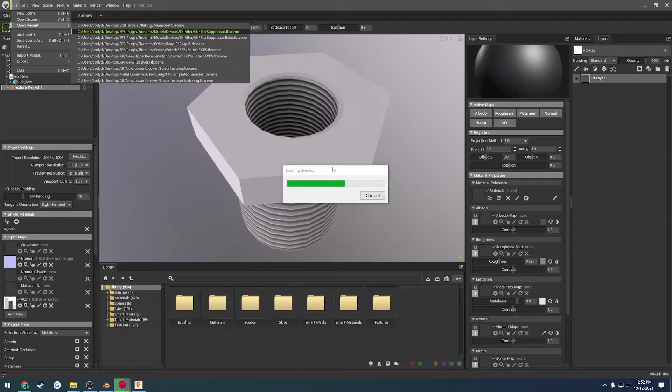All we're doing is we're making this guy here. So we're making the bolt. And as you can see in my version, I have some baking issues. Thankfully, they're on the inside and they're not going to be seen. I'm going to show you how to resolve those as well.

Because again, this whole thing right here is actually made right inside of Fusion360 with a little bit of cleanup inside of Blender, and was completely retopologized inside of MoI 3D. So just minimal cleanup. So I'm going to show you how to do just the bolt. So this should hopefully be a quick one.

I recorded this once already and it ended up being 40 minutes. So let's try to pick up the pace on this.

So basically what we want is to find some reference images. A friend had referred me to yandex.com, which has been phenomenal. So once you find one image of what you're looking for, you can find a ton of related ones immediately, and you get a lot. I don't know if you can see them all that well because it's not the greatest image, but basically we have two thread types.

We have the bolt with a slight chamfer. I don't know if I'm going to bother doing that. We have the outer threads here, which just go into the oil filter. So those are 3/4 by 16. And we have the inner threads, which thread onto the muzzle, which is 1/2 by 28. So we want to mimic those threads, and we want to get this relatively close.

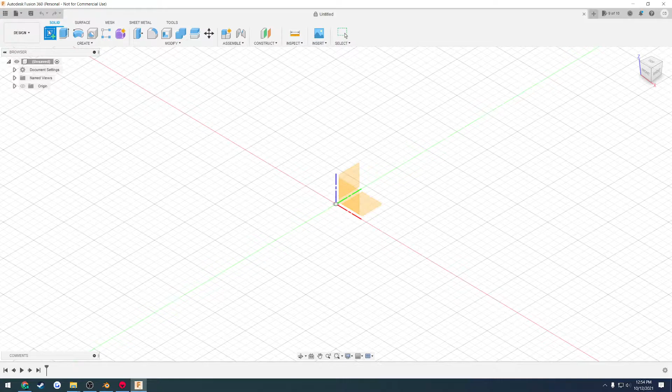So to begin, here in Fusion, we're just going to go ahead and create a sketch. Do it on any plane you want. I'm just going to do this bottom plane here. And we want to actually create not the outer threads, but the outer cylinder that we can cut the threads onto. That's going to be kind of our basis for scale. So we know that that is going to be 3/4 of an inch.

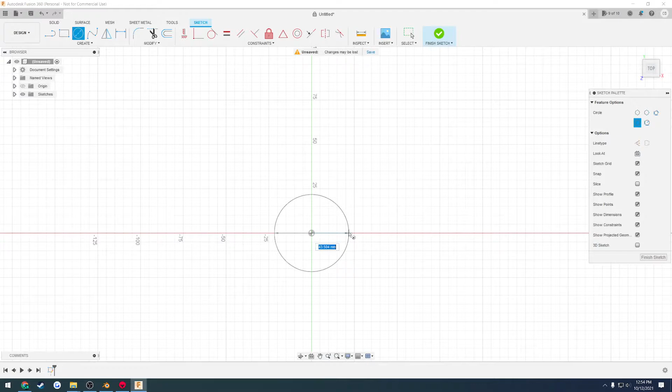So what we do, click this center diameter circle, select the middle, and we know it's 3/4 of an inch, so that's going to be 0.75 of an inch. And there we go. Now you want to make sure this is not the radius. As you can see, this arrow here stretches all the way across from one side to the other. If it stretched from the middle to the outside, you would want to halve whatever it is. So anyways, this is going to be the sketch that's going to contain all the information for the bolt itself. So I'm going to name it bolt.

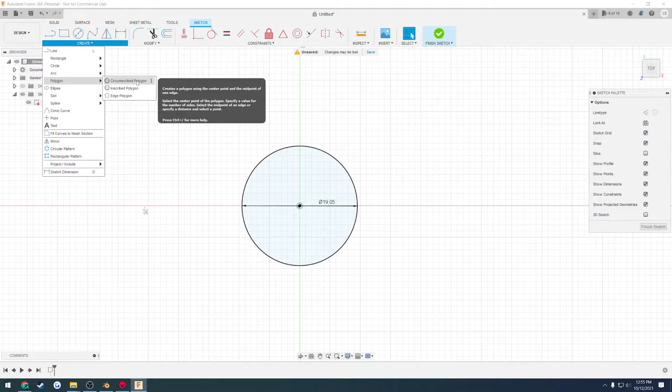Now I want to make the head. So to do that, we come up here to Create. We're going to go to Polygon and hit Circumscribed Polygon. Select the middle. And here we can see this is roughly where it's going to be to match up. So as you can see, even though it says 11 millimeters, I am bigger than our circle here. That is 19.05. That's because it's using the radius.

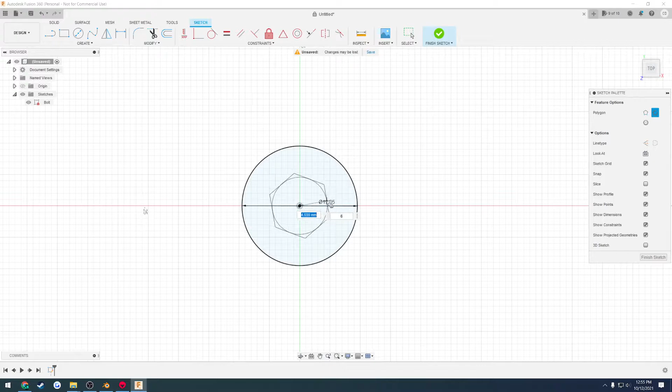So 9.525 is going to be roughly the same radius, actually it might be the exact, as this guy right here at 19.05. So I'm going to go to 12, and if I double that, I know that that's going to be at 24 millimeters. So it's going to be about there. So I press enter, and now I have roughly a 24 millimeter head. So if I were to grab a 24 millimeter socket, it should fit right on.

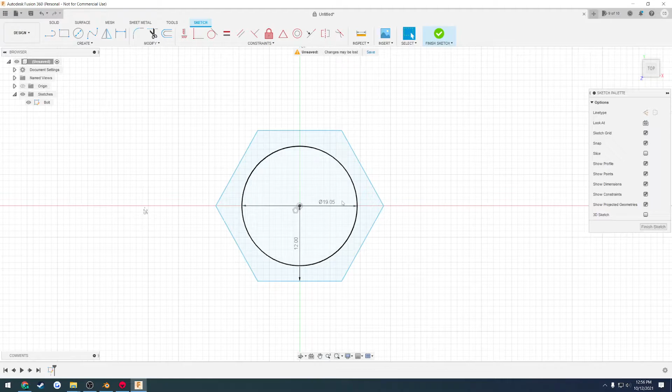So that's kind of roughly what you would use your real world baselines to follow. Okay. So now we want to set up and start extruding. So I'm going to hit finish sketch. And the way I'm pivoting around is I'm holding down left shift and middle mouse. If I let go of left shift and just use middle mouse, I can pan around.

So this is not a full Fusion360 tutorial. There are plenty of other videos about it that are way better than mine.

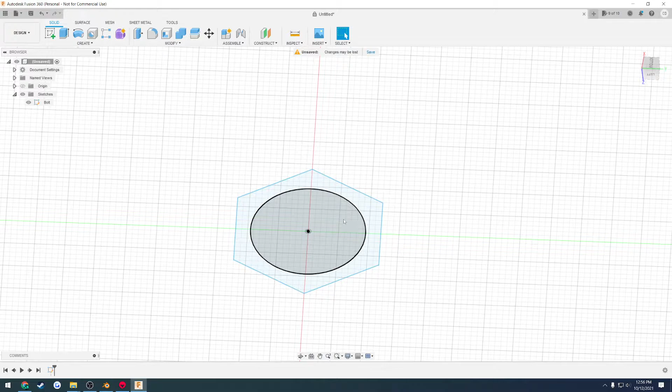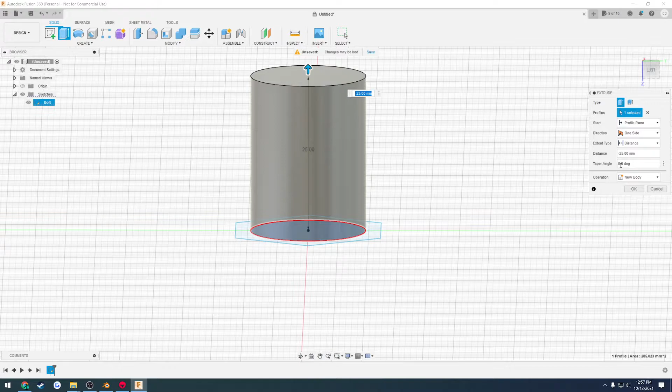So I'm just going to click on this inner circle here, and I want to press E to extrude it, and I just want to extrude it up. So we're going to do somewhere along the lines of probably, I think 25 millimeters will be good because this head's going to take up about 5. So we just drag it on up. It's going to say new body. We just press OK. As you can see, our hex head down here is gone.

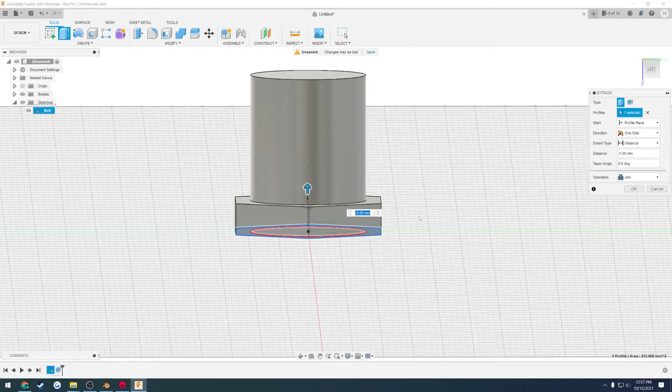So we can unhide that by clicking the little eyeball, whatever you call that. Clicking on the outer ring, as you can see, it only selects that part of the face. Press E to extrude. And we're just going to go up by 5 millimeters. Now, if for some reason this is all showing red, it looks incorrect and all that kind of stuff, if you look over here, it might say cut.

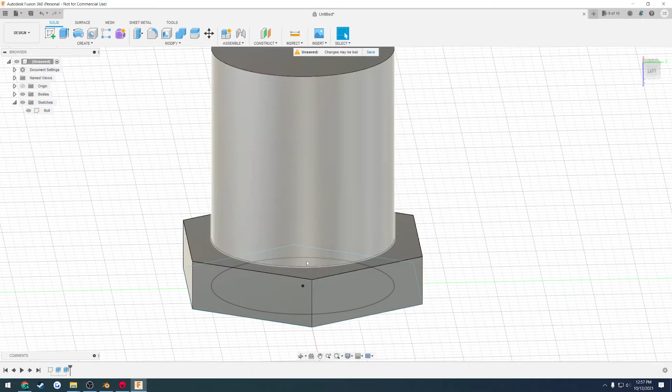In this case, I don't have a way to cut it because it's not intersecting at all. You want to make sure it's set to join. So we press OK. And now, as you can see, it joined the two together. They are now one single body. So we have our bolt, just with no threads. And realistically, that is what we want.

So next up, we need the inner hole. So we want to cut these threads out, which are 1/2 by 28. So we know that the inner hole here is going to be a 1/2 inch. So we got to make that. So the way we do that is I'm going to do that in a separate sketch. I like having dedicated ones for my cutters.

So click on Create Sketch. And if you can't select the plane that you want, make sure you're looking down, hold left click, and you can select whatever your mouse was going through. So in this case, I can select that face or X and Y. I want to select X and Y. And create my circle, just like before. And I want this one to be a 1/2 inch, so 0.5 inch. And press enter. We're going to hit finish sketch.

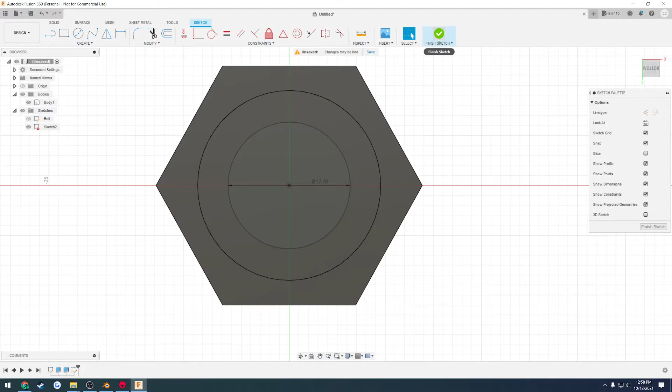Click on our circle. Press E and just extrude it right on up. And this is that red that I was talking about. And as you can see, it's set to cut. That's because it's a cutter. So you can see where it's wanting to cut out. So we just press OK. And we now have our hole.

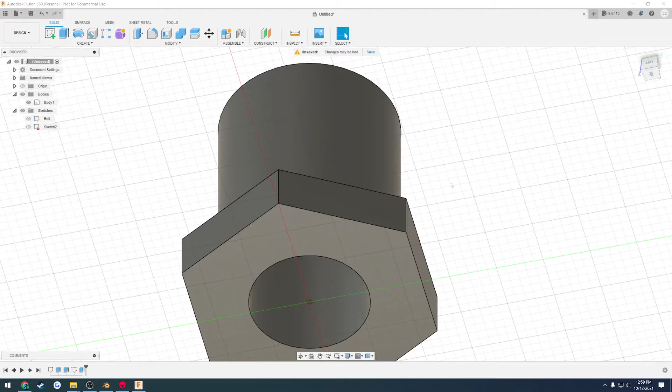I'll be right back. I got a text. Alrighty. So let's see. Yeah, back to where we were. It's only been about a couple seconds.

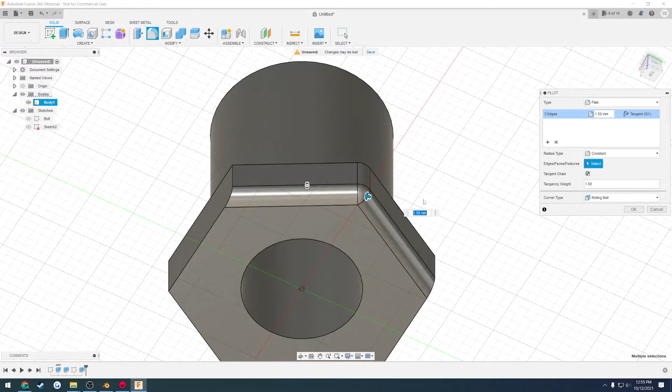Well, we can add a little bit of detail here. So if we look at this bolt here, it looks like we got a slight chamfer maybe around the edge. Or is that, let's see, what do we have? So we just kind of have it around the edges here. Nothing really fancy. We can do all that. Nothing real extreme. So it looks like they're very, very small edges.

I don't know if I want to do that because I kind of want to keep them sharp. I think that'll be better visually. So we'll probably just leave that. And we'll focus on this inner chamfer and the cutting for the threads. So we're going to do the threads first.

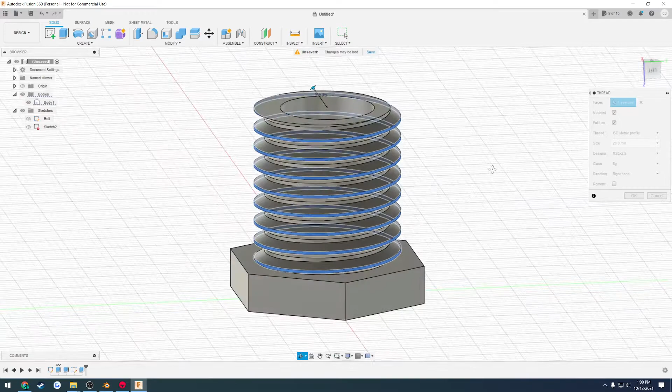So the way we do that is we click on wherever we want the threads to be. So in this case, I want to do the outside, or if I want to do the inside, I just select it. So I click the outside, go to create, select thread, check modeled, and in our case we want it to be full length because obviously it goes the full length of the shaft, and we want to change this to standard. So currently we're on metric. We can go to unified screw threads.

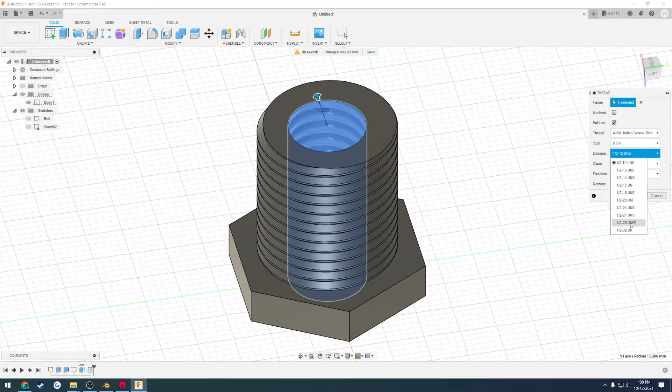Here's where we have 3/4 by 10. We want to go to 3/4 by 16 and press OK. So that'll give us the correct threads that we need there. We select the inner, do the exact same thing, change it to standard, and we want 1/2 inch by 28, like so. And again, make sure we check modeled. Press OK, and there we have our threads.

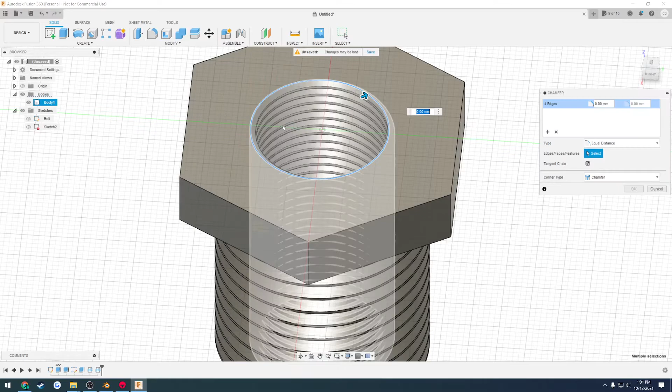So now we want to add just kind of a slight chamfer. Now, here's the cool thing about the timeline. As you can see, if I want to chamfer this whole edge, I would have to go through, select all these, and then I can select chamfer and just kind of see how it goes. It'd probably be fine. So that does okay. I'm not a huge fan of the result, but what we can do is simply drag this timeline before we cut the threads, or before we cut the inner.

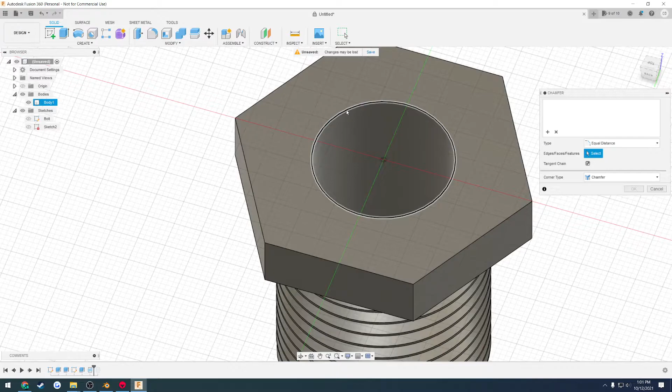Then we can select the inner ring, like so, and we can add our chamfer. Whoops. Just like that. So I'm going to go 1 millimeter. That actually looks quite okay. So we'll leave it at 1 millimeter. Then we can just drag the thread back over it, like so. And as you can see, it's not cutting into the chamfer. So I want it to.

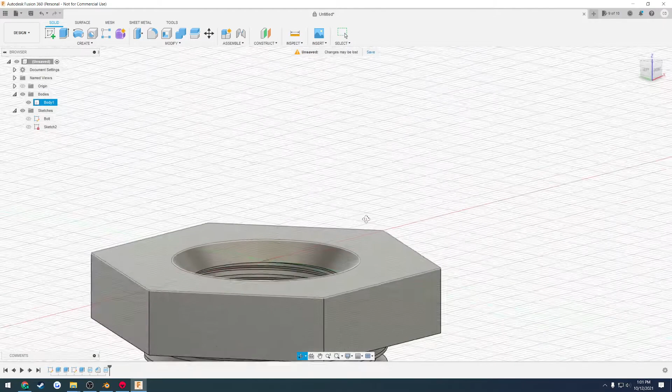So I want to just simply drag our chamfer right here over to the other side of the thread. As you can see, we have our chamfer and our threads now cut right into it. So it's become a part of it. And in my opinion, that looks good. That's kind of what I want.

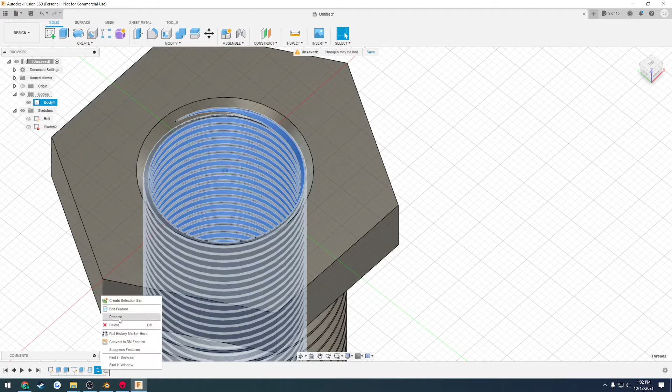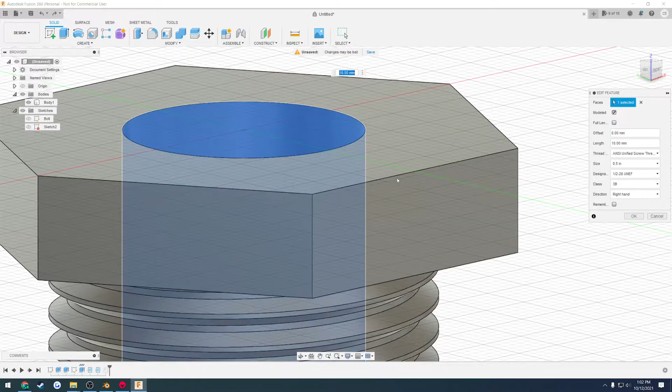And if we want to tweak it, what we can do is we can change that from full length and instead go really just as far as we feel we need it to go. So I can go slightly lower, press OK. Granted, that's going to give us the same result. Actually, I pressed Control Z, so that's part of the reason why. I can go a little bit lower like that, press OK, and we just get ever so slightly different results. So I'm just going to Control Z, go back to full length, and leave it like so.

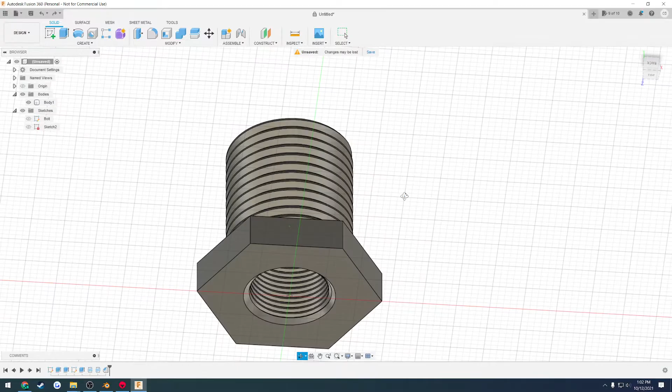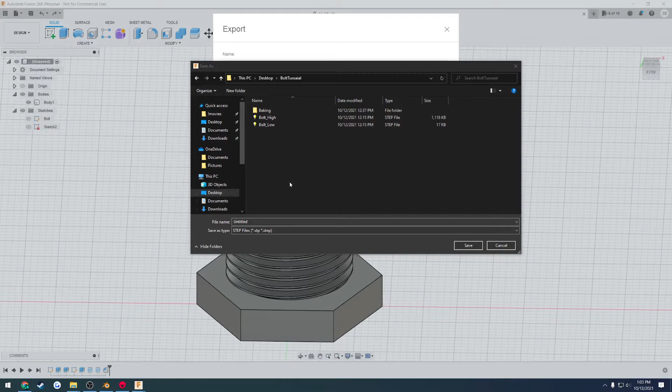So this is our high poly right here. So what we want to do is we want to export this out and then work on the low poly. So let's go ahead and export that out real quick. We're going to go to File, Export, change the type to STEP, and save it where we need it. Like I said, I did this before, so I'm going to delete all these real quick and get started fresh. Alrighty, so I'm going to name this one bolt_high and export.

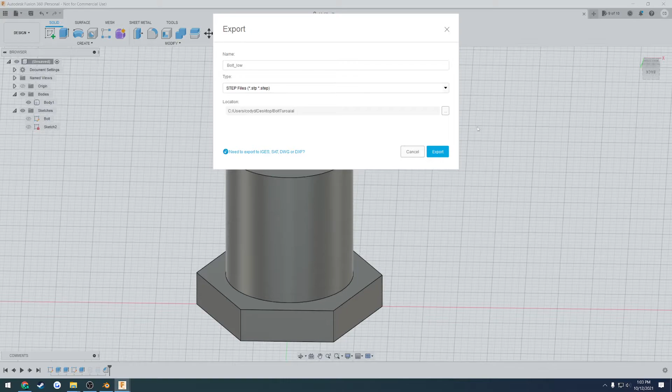Then to make the low poly, select both the threads, right click, suppress the features, and do the exact same thing, just name it bolt_low and hit export. Now the naming in this case doesn't matter. I'm just doing it for the sake of cleanliness, so I'm going to open up the low in Moi 3D. So once I'm in here, I just go to save it as FBX, and I'm going to name this one bolt_low. And here I can change my settings.

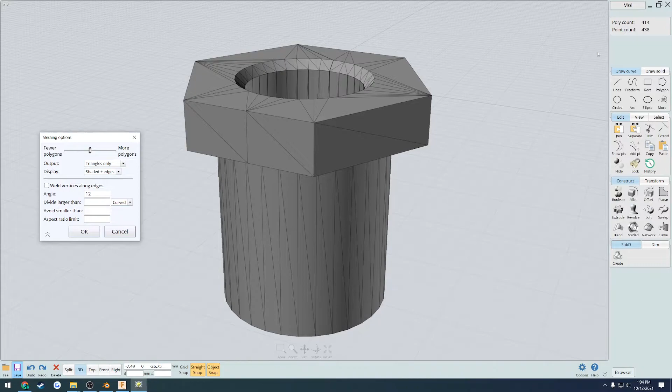So if we want to see the poly count, you can see we're at 914. I just set it to triangles only so I can see it, or 414, sorry. And that's a little high for me. We don't need that much detail for something like this. So if I bump this up to 20 and look at it now, that's a lot more appropriate in my opinion. We're down to 270. I think it looks good. Let's check 25. And to me, that's going to be a little bit much because we're going to see a lot of these harsh edges. I think 20 should hide them quite nicely.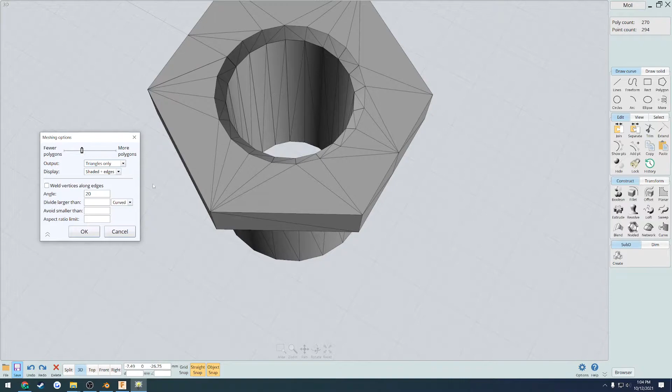So we're going to select back to N-gons. As you can see, that is much easier to work with inside of Blender. And just press OK. And that exports it out for us. Now we're going to do the same thing. We're going to hit open and open up our high poly.

The reason I do this is because I want to lower it since it's a little excessive when you don't. To show what I mean, let me change it to triangles and press 0. As you can see, this is 326,000 for the poly count, and that's just super dense.

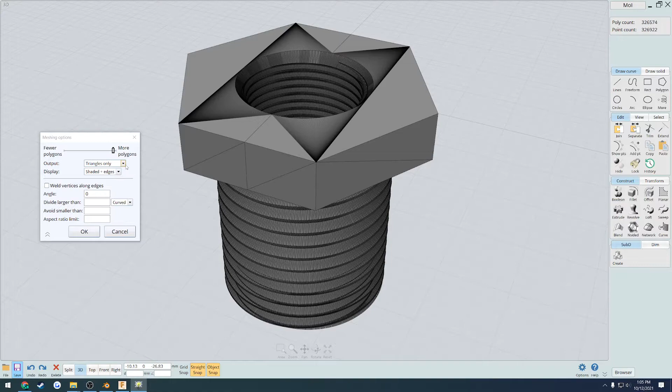There's really no reason for it. Same thing, I've had some issues where I would export the high poly out as a triangulated mesh already from Moi 3D, and when I bring that into Blender, there were some issues with how things were set up. So I want to change it back to N-gons and lower this a bit. Let's go down to 3, and this is at 25,000.

That is nice and smooth. Obviously, the bigger the number, the less detail you get. So I want good threads, so I'm going to leave mine at 3 and press OK.

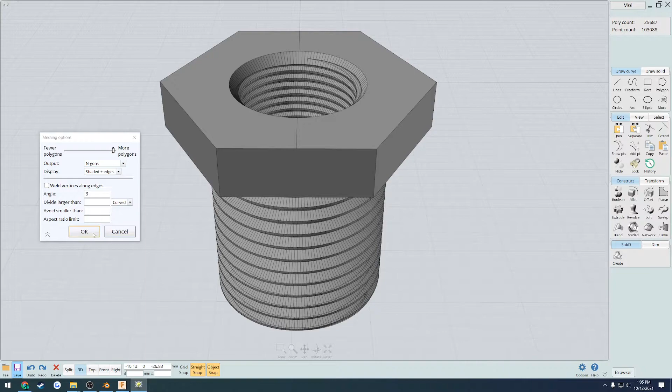Now let's go to Blender. I want to save this and bring in those two models. So we're going to import FBX, select both, and I'm going to scale them both up by 100.

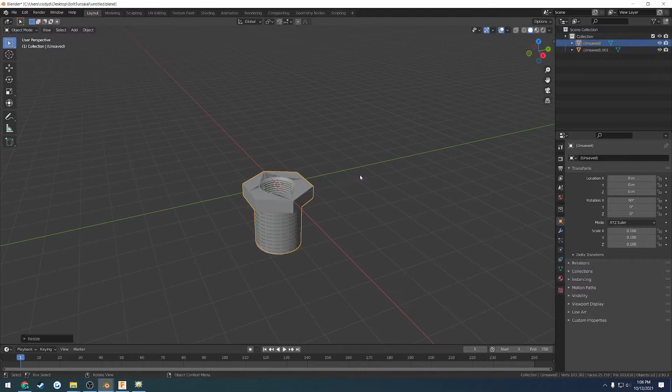This one here is the high poly, so this one's going to be the bolt_high import. This one here is the low poly, so we're going to do bolt_low import, just so we have the naming and know which one's which. All right, I'll be right back. Someone just pulled in. Alrighty, I'm back.

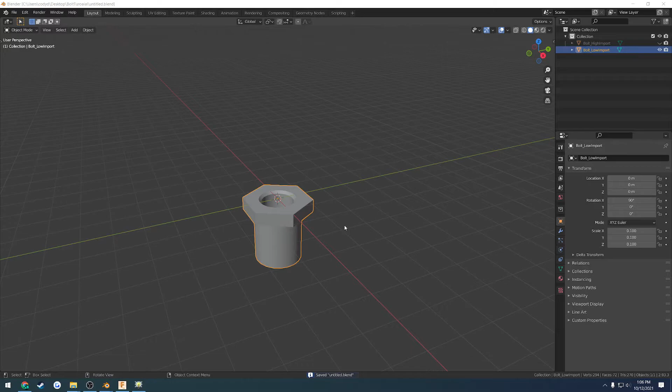The reason I'm doing this is because I want to have a separate mesh for the low poly and high poly before I export, because these are not triangulated. I want to have a separate mesh before I triangulate. Same thing goes for the unwrapping here, just to make life easier so I can duplicate it, triangulate it, and export it right out.

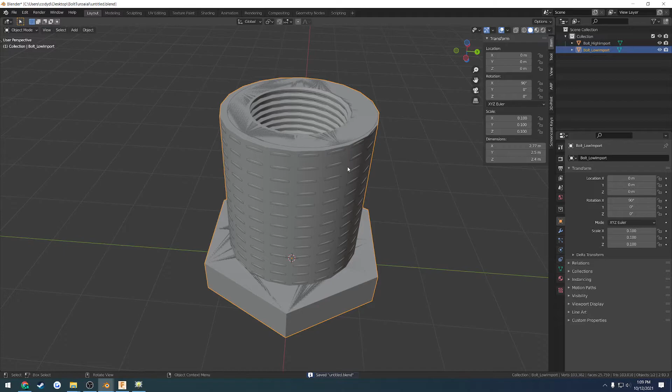So we want to go ahead and actually unwrap this, but first we want to apply everything we have. I'm going to select both, press Control A, and hit all transforms. As you can see, that did both. Let me turn on screencast keys real quick.

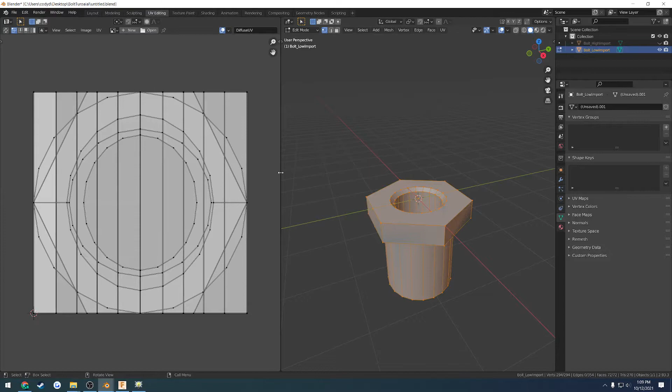There we go. Once we've done that, we can go ahead and unwrap the low poly. So we're going to go over here to UV editing and look at it. One of the things we can do, let's actually try to unwrap it first. This is the result that we get.

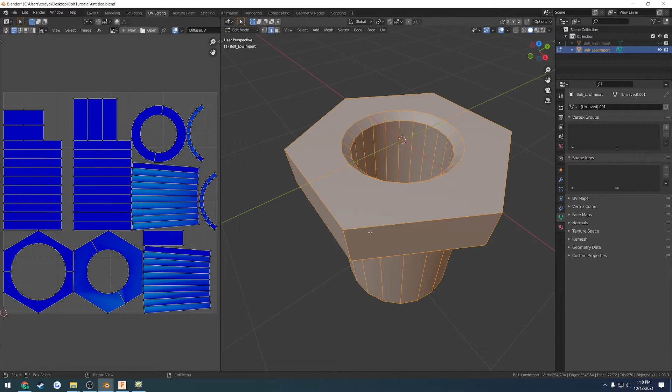Let me enable stretching. This is kind of like an auto unwrap setup, but we want to do this manually because we can clean this up a lot. We don't need to have all these curves, it's just ugly. So normally, I don't know why it didn't come with them, but normally they're marked...

The edges are marked as sharp, and just to be safe, we want to do that again anyways. So I'm going to go to Edge Select for this layout, and we can select all around the edges. However, when I Alt-click, normally it's supposed to select the whole ring.

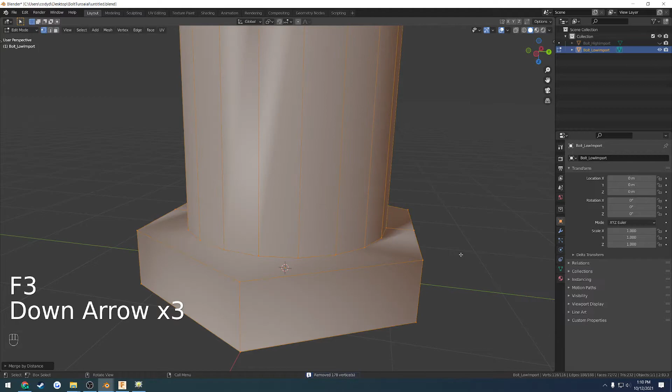But you can see if I click on one of these vertices, there's actually two here. That tells us that we need to press A, press F3, and do Merge by Distance. As you can see, that right there broke the shading. So if we click on Sharp Edges...

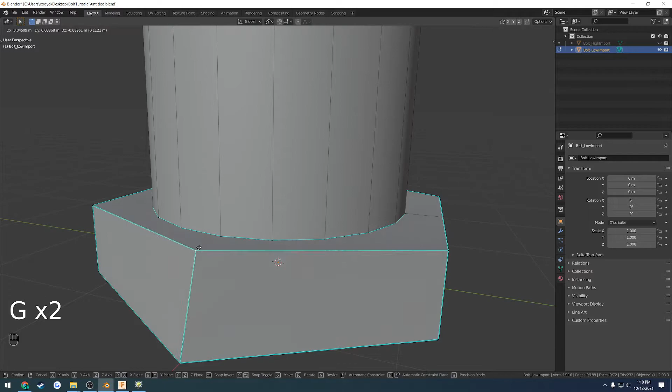Now it's actually showing our sharp edges. They were kind of being hidden by the overlapping or overlaying faces, I think. So now when I move them around, as you can see, everything is fine. Normally you would end up getting this exported out as sharp for us, with all the edges marked sharp that we need roughly.

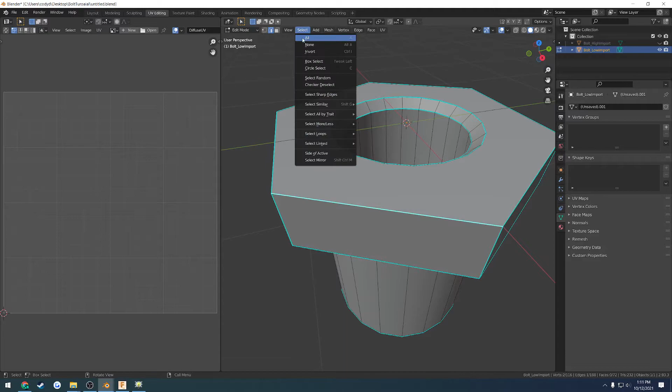Back into UV editing, I want to show you a little shortcut. If we click on one of these sharp edges, we can go to Select, and Select Sharp Edges, and that selects all the edges that are marked sharp. Then we can right click and just hit Mark Seam, and that'll give us a decent result.

We obviously have some stretching here and stretching here, for the inner and outer cylinder because they don't have any seams. But I want to fix this issue up first. So I'm going to click this little arrow so we can see them both without having to click on anything.

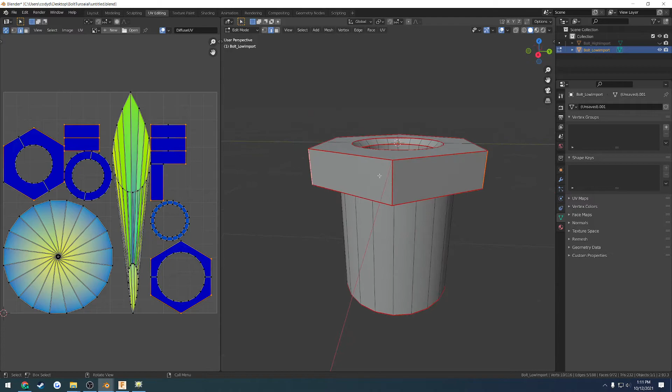I am not a fan of how that has broken this up into little pieces, and that's because there's a seam everywhere. So I'm going to click on pretty much every single one except for one like that, and simply clear the seam. Then when I unwrap, as you can see, it is now all in a straight line right here. So that's great.

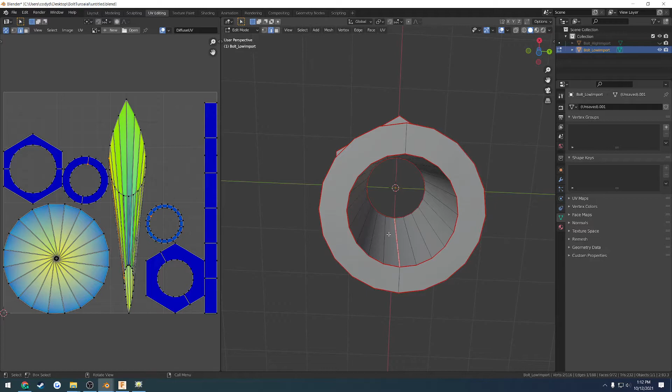Now we got to fix this issue up. If I click L here, you can see it's the entire inside. I'm just going to select where they're linked up together like this and mark it as a seam. I'll do the exact same thing right here on the other side and mark it as a seam. And unwrap, and now we are good to go.

Now we just want to help the UV space because we have a lot of wasted space here. With this plugin, if I hit Update Stats, we're only using 35% of the area.

So if I want, I can go to UV Packer. This is a free plugin. Go ahead and Google it, and it'll just take you right there. Just look for UV Packer Blender, and you can change the padding to 3, change the type to high quality, and hit Pack. And that's the result it gives us.

So let's compare. We have 35. Now we have ever so slightly more, but we also have a lot more free space. So it's kind of compacted it.

Now this did not do a very good job for whatever reason, I don't know why. But what I'm going to do is click this again. The reason for that is because when I press L, it's selecting other edges as well. If I unclick it, and then press A to select all... sorry, I got interrupted. But the reason for that is now when I select it, I only moved that around. They're not linked together really in any way.

So here, I can drag it inside. Yeah, I'm going to go inside of that one. I don't know if this one will fit. Might be a better option. No, I do not trust that.

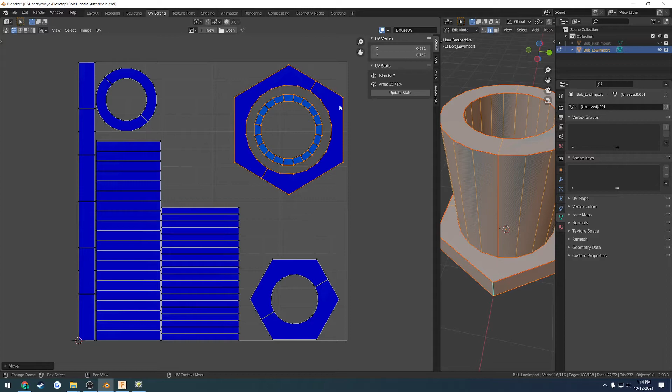So let's see which one is that going to be in for? That should be for this top guy. So realistically, we don't need that much detail there. Let's see, that ring is going to be for what? Okay, so that ring, this guy right here corresponds to this inner side.

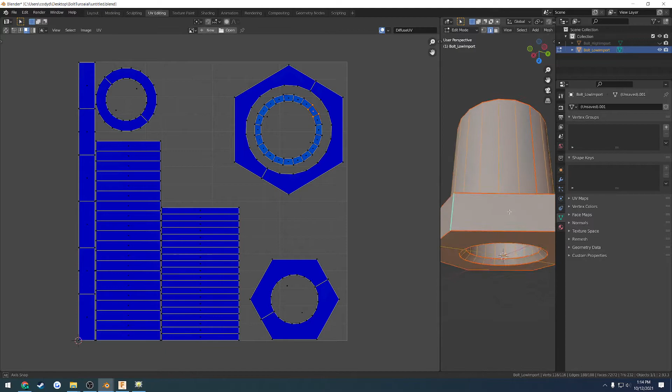This top corresponds to here. So these are areas that we really don't need much UV space wasted. They don't do much, they're not going to be really visual. So I can select this guy. This is one I want to scale up a little bit more. And I'll move it over.

So from here, let's see. These are the halves. So my guess is, yep, that is going to be this outer edge right here. Again, not all that important, so we can just take it. I'm going to move this one over here as well. And that gives us a little bit more space.

So what I'm going to try to do is kind of expand these up a bit. So this is going to be the outer threads here, or is that going to be the... no, that's going to be the inner threads. So right here, and this row is going to be the outer threads. I'm just going to kind of scale these up however I can, while still making them fit.

Something probably along the lines of that. And then these are going to be the inner threads, and I'll make them take up a little more space, something like this. Okay, now I can select, and I'm just going to move it over, make it a tighter fit. I'm going to select these two, move them down, and I'm just going to scale them up.

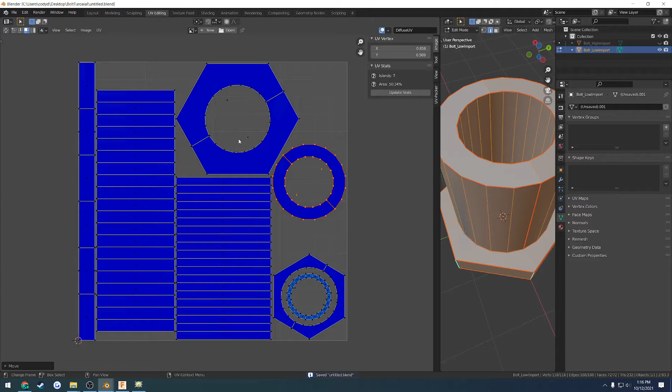Take up a little more space, select this guy, and do the same thing, just like so, so they take up more space. Now when I hit update stats, I'm using 50% of the UV island space as opposed to the previous 30, I think it was like 35. So we're taking up a lot more space, just a lot better, and that's what we want.

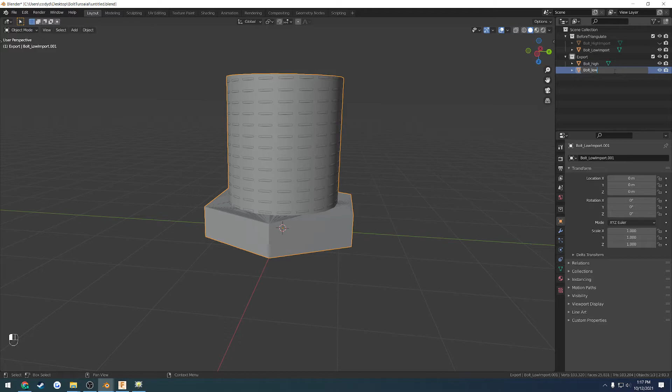Now I want to set this up, and I want to triangulate the high and low poly just in case. So I'm going to rename this collection to 'before triangulate', then duplicate this collection and name it 'export'. Then I want to rename these to have the suffix underscore high and underscore low, and hide the before triangulate collection.

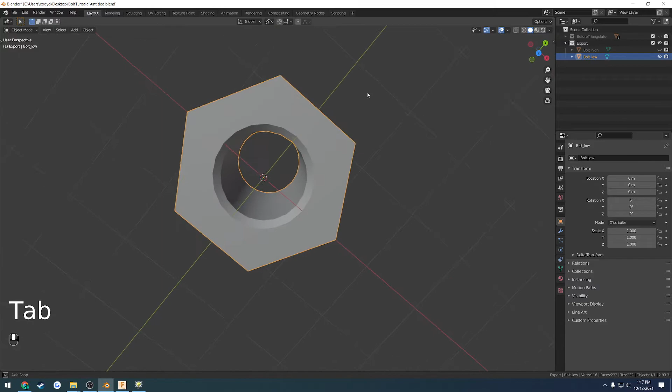Let's work with the low poly first. I'm going to go to edit mode, press A to select all, and Control T to triangulate, and look at the job that it did. That's honestly probably what I would have done roughly manually, so we're good there. Let's make sure there's no real glaring shading problems, and in my opinion this looks just fine.

We're going to do the same thing to the high poly. Press A, Control T to triangulate, make sure there's no real problems. I am not seeing any. That's dense enough of a mesh where we shouldn't have any anyways.

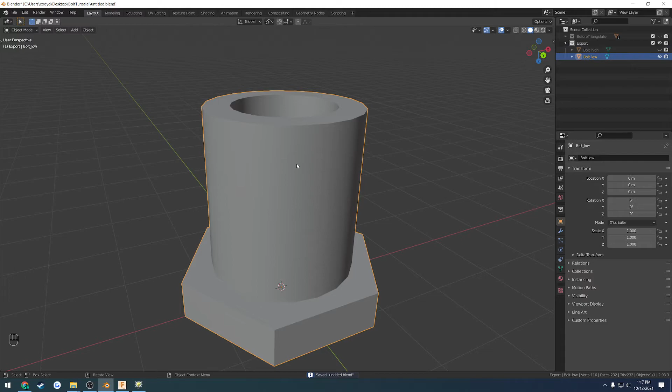Now we're ready to export. So we're going to click on the low, File, Export, FBX, and I'm going to create a new section and call it Baking. Let's go there, and this one's going to be bolt underscore low. Now I want to change these settings here. I'll make a preset, but we're going to do selected objects, mesh, scroll down to geometry, change smoothing to face, and uncheck bake animation, even though it's not going to do anything in this case.

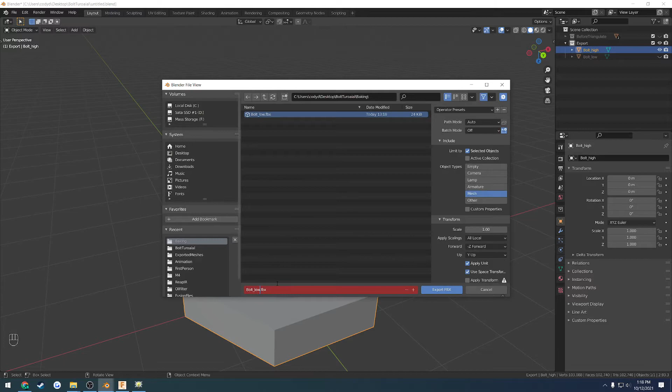So now we can hit export, and we're going to do the exact same thing to the high poly, except we're going to name it underscore high this time, and hit export.

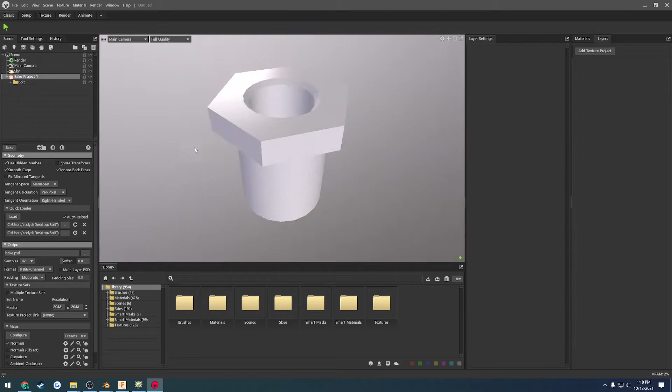Once that's done, let's head over to Marmoset, and we're going to get our bake set up. So we're going to click on New Bake Project. We're going to use the quick loader, hit load, and select both the high and the low, just like so. Now when I hit H to go to the high poly, we can see we have the high poly. Go back to the low poly, we have the low poly. So now we can try to bake this and see the results that we get.

The first thing we want to do as well, hit P. Actually, we do have a material set up, so we're just going to hit P. Let's set up the baker path first, actually. So for baking, I want to change mine to Targa and call it T underscore bolt bake. And hit P to set up the preview.

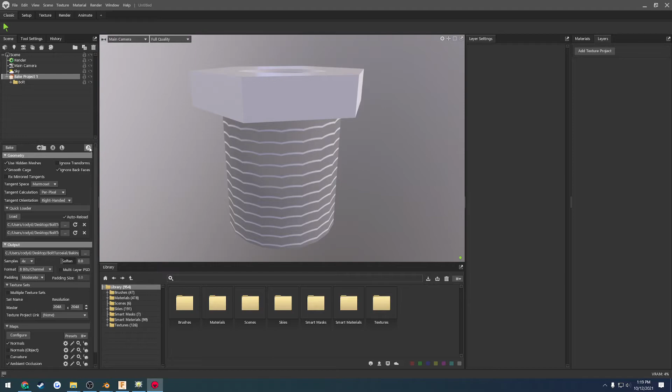So this is just with only the normals. I want to actually select the ambient occlusion as well, because I want to bake that, and press bake. Now press P one more time so it adds the ambient occlusion to it. As you can see, all it's done is taken the map that we have and applied the normal map and the occlusion. So this doesn't look horrible.

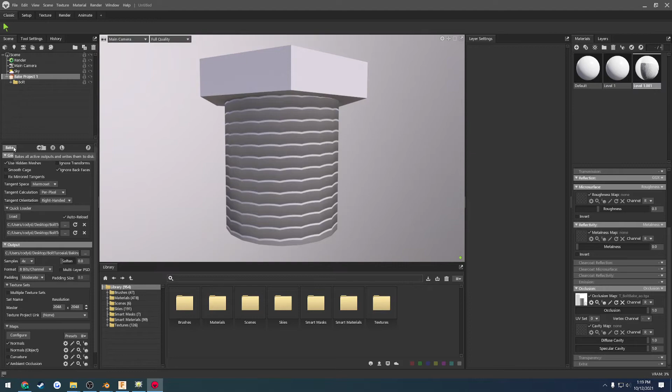The outside threads do have problems though. The way we can actually resolve that normally is to just uncheck smooth cage and bake it again, and you will see the result drastically cleans up. It follows the shape of the threads much better. The only problem is it has kind of messed up these inside threads even more. You can see it's not really hitting correctly, like it's almost as if the cage is too far in. So we've got to fix that.

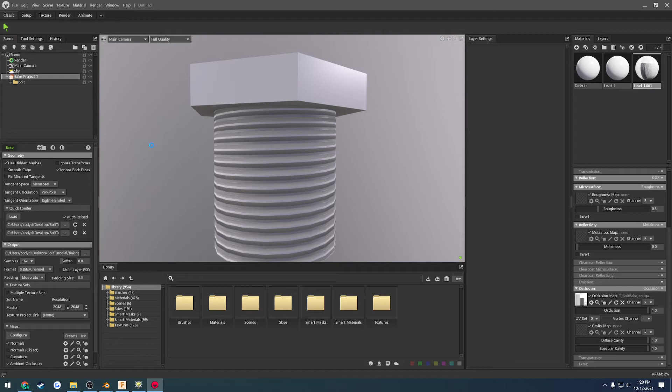Same thing, we can also increase it a little bit. I'm going to go to 16x, and I'm going to leave it at 2048 by 2048. And I'm going to go ahead and do one more quick bake.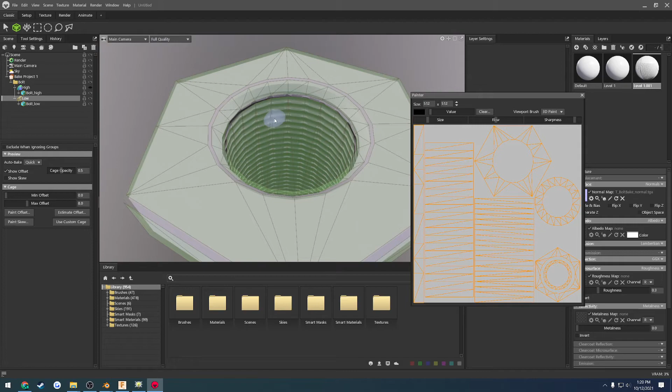Now I'm going to go to our bolt, click on the low, and here you can see we have our cage. So I'm going to click on paint offset, and I want to - did not mean to draw - paint this inside here to be pushed out. So to go out, I want to make sure this is at white.

If it's black, as you can see, it's sucking it in, but if it's white, it pushes it out. So we make sure it's white, and we want to go somewhere on here. So we see that when I draw, we're on this inside, we're on those threads right there. Wish I could make this full screen. So that's how we want to draw it.

So we want to get right along the edge the best we can. I'm just doing this to create kind of a buffer. Make sure I don't hit anything else. Okay, just about. And what, I got Parkinson's or something?

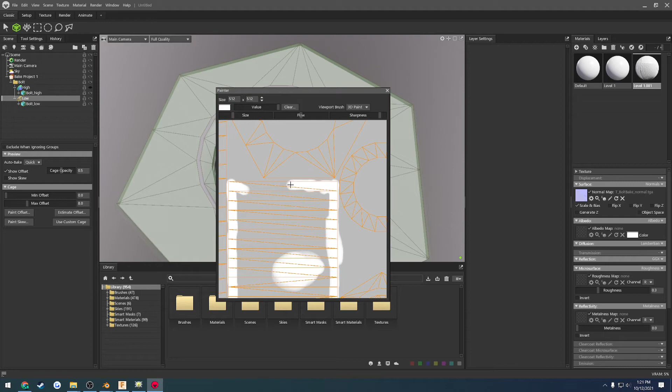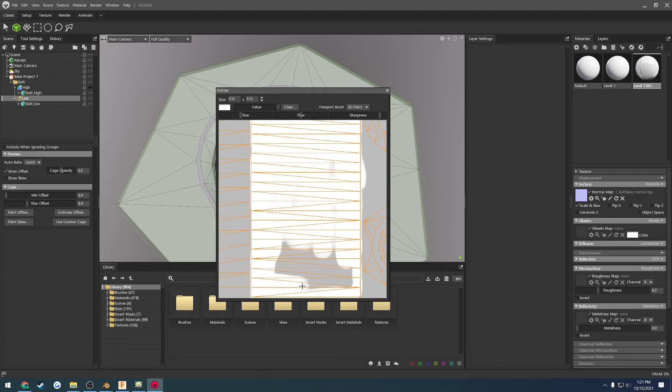There we go. So now I want to do the inside. So I can bump up the size a good bit without really having to worry about keeping my borders tight. And there we go. So we have that all set up. So now I'm going to go back to the bake project and hit bake once more and see the result.

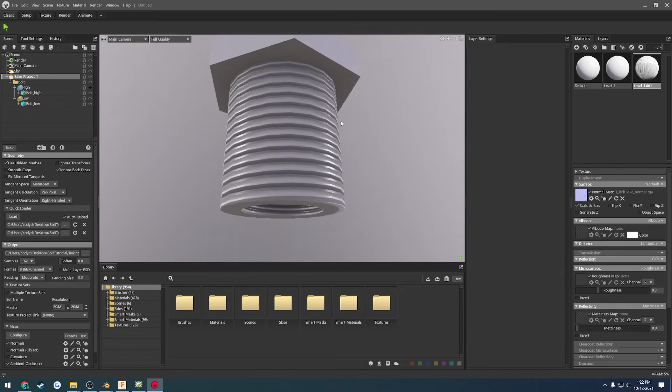Okay, so as you can see, that cleaned up all those marks. We now have a surprisingly good bake. We do have a little bit of the same problem down here. We might be able to fix that in the same manner. I don't know if it's worth doing or not, but let's just see. We're just going to do a quick one. Actually, no, I don't want to do that. So let's find it.

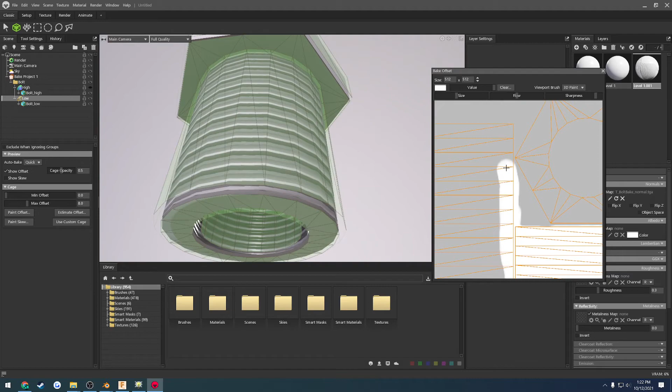Okay, so we know that should be this whole bottom. Yep, so what I can do is I can just simply spam it, kind of like that, because that's all I'm really going to be painting against, like so, and hit bake. Okay, so we have the same result. That tells us that it is not important, because it clearly is not doing anything. So, just going to do one final bake, and we now have our maps.

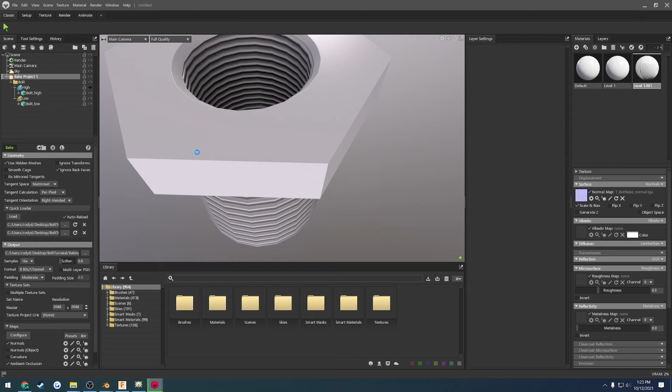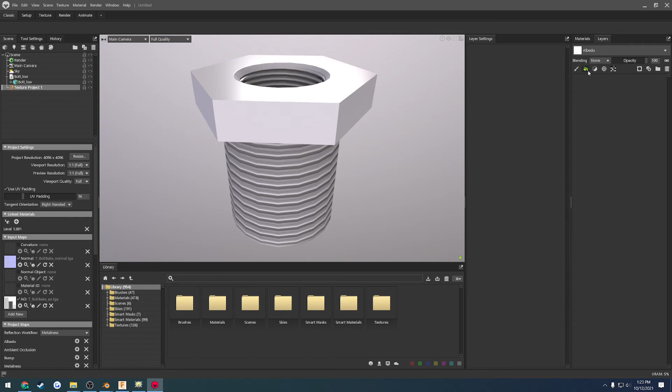Okay, so now that we have that, I'm just going to do a quick little texture project. I'm going to do that in a new scene. So I'm going to import the mesh just below, add a new texture project, drag and drop the material to link it, and select our normal and our occlusion, and drop a simple fill layer on top of that, just so we can see roughly what it looks like. Okay, so this is pretty much what our bolt would look like. So we have very good, in my opinion anyways, baked threads on there.

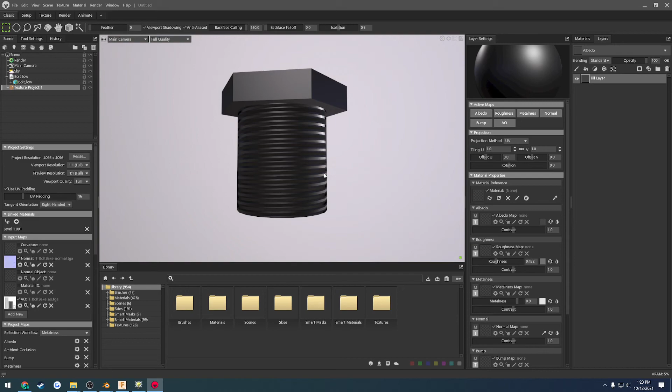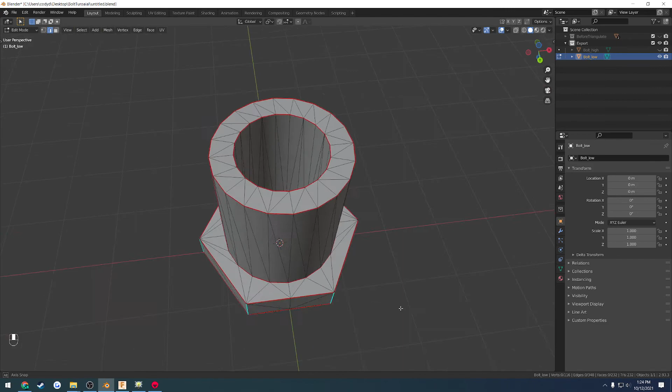So that is the workflow, not sure why I have another Blender project open, but that is the workflow from Fusion to Moi3D to Blender, and then to whatever texture software you want to use. So as you can see here, here's our low poly that we received from it. We're only at 232 triangles. We have a pretty good amount of details still on it. And if this was a really small bolt, we could drop that down to well under 100 and still have a good amount of detail that we would get from our bake.

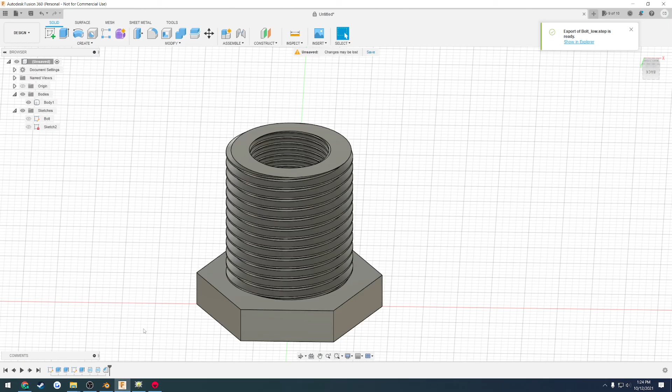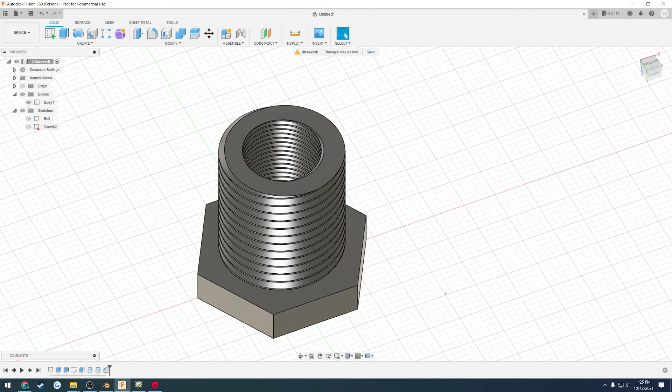So that's the main thing. And we have that very easily and very nicely set up, just simply through features that we're able to hide and unhide that make our life just drastically easier. So that is the CAD workflow to game asset. Hopefully that kind of taught you something, or helped you understand it a little bit more. But it is very powerful. It is what I have been using for pretty much everything hard surface for the past couple months. I have not even bothered to touch Blender half the time unless it's for something quick like a simple table, because it has just been much quicker.

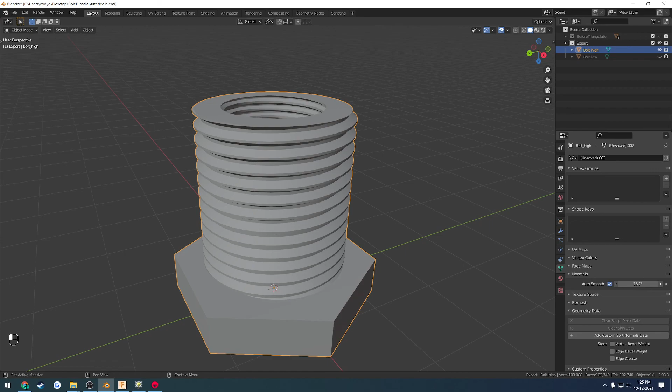And same thing, when you export out from Moi3D, it shades it for you, like it provides its own shading information. So if I click down here, we go to geometry data. As you can see, it gives its own normal data. So that's why we can't change any of this, because it has its own data already on it. The only thing we can do is clear it. That allows us to change it kind of however we wish. However, this mesh is just so dense, I don't think it even matters.